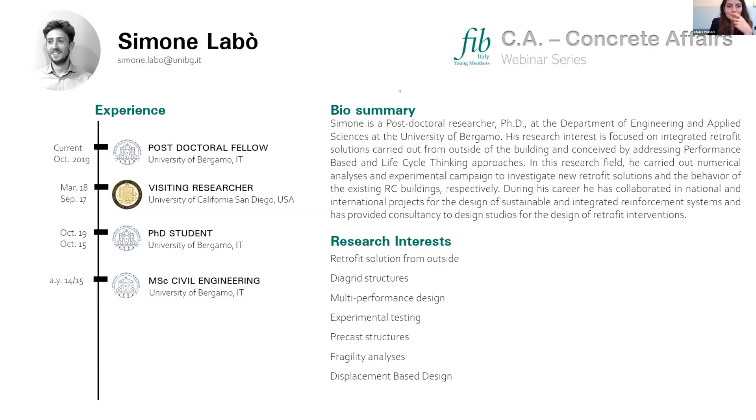Good evening. I'm just trying to understand how to share my presentation. So may you see the presentation? Yes, perfect. Okay, thank you, sorry.

Good evening, everybody. In this presentation, we are going to talk about integrated and sustainable retrofit solutions adopting life cycle thinking principles. We are going to present some concepts and results that we produced with our research group at the University of Bergamo.

It's well known that the construction sector is a very impacting sector, responsible for 50% of raw material consumption, 35% of waste production, 35% of energy consumption, and also 35% of greenhouse gas emissions.

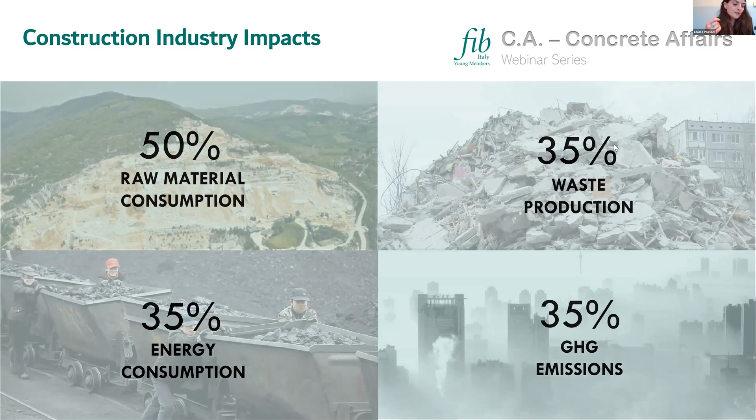I don't know if you noted it, but lately every seminar and every paper about sustainability of the construction sector just opens with this figure and these numbers. Often we are so used to these numbers that we don't realize anymore what they represent, and that behind these figures we have real and tangible impacts that, years after years, spoil our environment, our landscape, our planet, and our health.

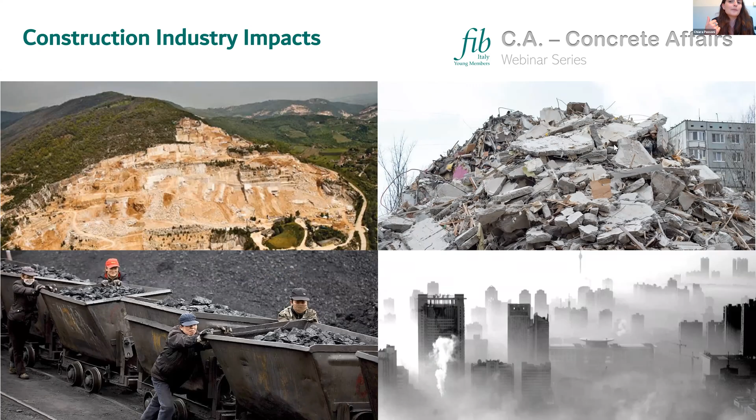So to make these numbers more tangible, I would like to report some data about the construction industry impacts. Just to make an example, in Italy last year, 29 million cubic meters of sand and gravel were extracted, 26.8 million cubic meters of limestone, and 3.6 million of clay, just to produce about 19.2 million tons of concrete, which is about 318 kilos of concrete per inhabitant. And this is just for Italy, and just for the last year.

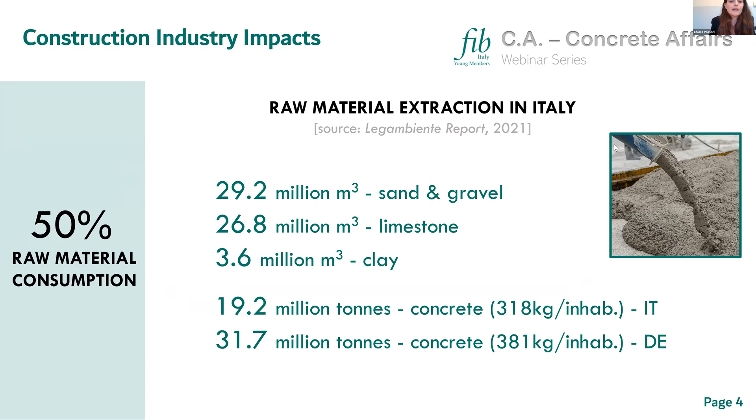About waste production, we know that C&D waste, construction and demolition waste, is the largest waste stream in Europe in terms of mass. In EU 28 in 2016, 374 million tons were produced, excluding excavated soil. Considering that by 2020 a recovery target of 70% of this kind of waste was set, it seems that we have a high level of recovery of this waste from construction and demolition.

However, the high recovery of construction and demolition waste is often based to a large extent on backfilling or low-grade recovery, for example for road subbases and so on. In addition, we should consider that in Italy a great part of the C&D waste is still not tracked, so data are not entirely credible, and the situation may be much worse than what appears.

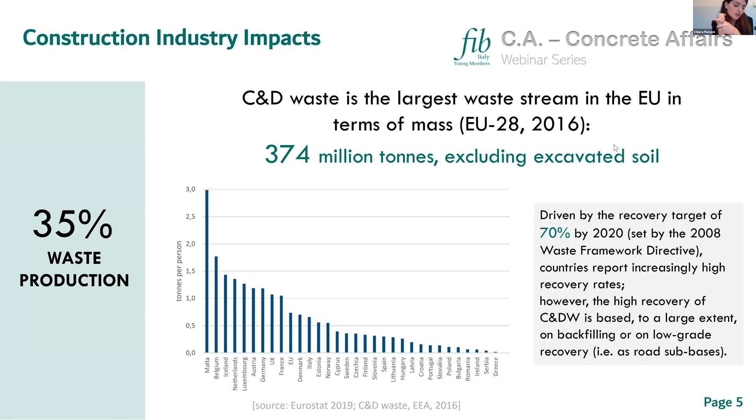About greenhouse gas emissions and energy consumption, we know that residential buildings are responsible for a large share of greenhouse gas emissions in Europe, due to operational energy use, especially for heating, cooling, generation of hot water, lighting, and so on. But this is not the only impact of the construction sector on the environment, because we should also consider that the production of construction materials generates a great share of greenhouse gas emissions, especially for steel and concrete.

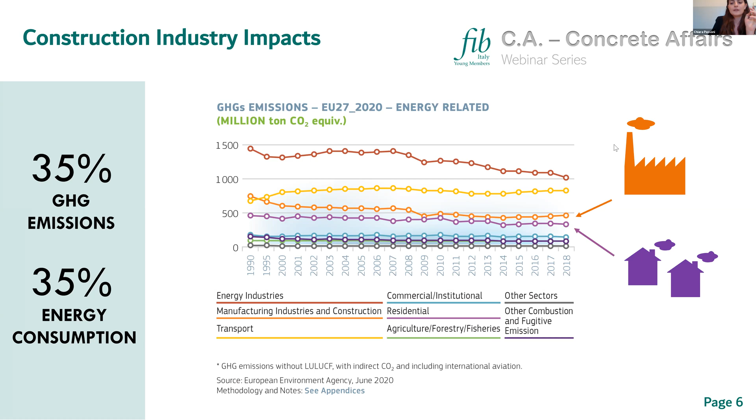So if we consider some 2012 data, we know that the steel and cement industries together accounted for 8% of global energy use and 15% of global anthropogenic CO2 emissions. And from 2012 to now, steel and cement consumption has greatly increased, so the greenhouse gas emissions connected to just these industries have surely increased too, not even considering all the other construction materials we use in the construction sector.

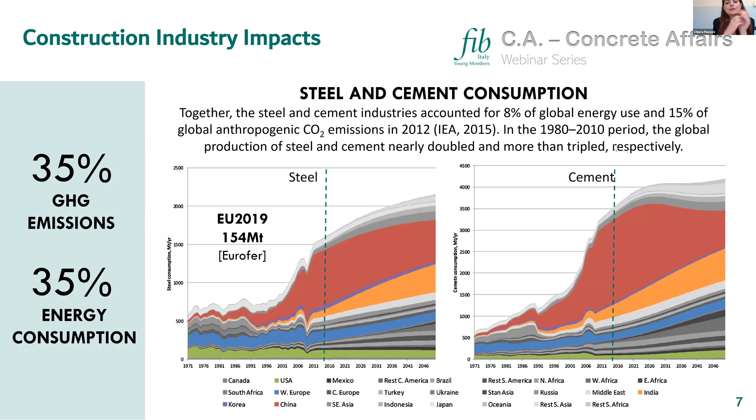These are just some numbers, but I wanted to give you an idea that the impacts of the construction sector are real and very tangible, and that all this is contributing to global warming and climate change. The effects of the construction sector's impacts on our environment are ones we can touch with our own hands, and we can see them in each of our cities. So now the point is, what can we do as engineers, as researchers, as designers, to reduce the impacts of this construction sector?

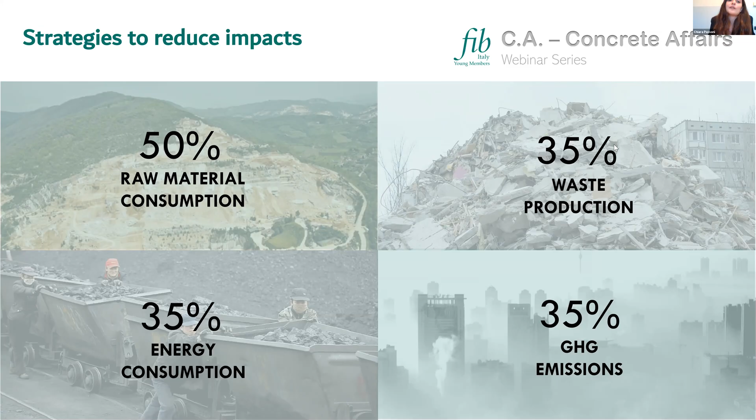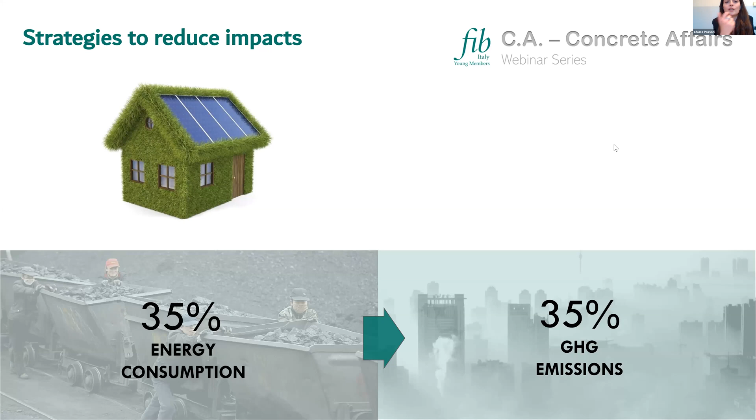So now, considering the European strategies to reduce impacts of the construction sector, we are focusing on the energy consumption of buildings, and so on the greenhouse gas reduction connected to that energy consumption. A BPIE report of 2020 states that in order to reduce greenhouse gas emissions and reach climate neutrality in Europe by 2050, we really need strong interventions on our buildings to reduce their emissions.

They compare two different strategies and scenarios, and they notice that the only way to reach climate neutrality by 2050 is what they call a responsible policy scenario, in which we have to shift to 53% use of renewable energy and reduce the consumption of fossil energy to 47%. And we cannot reach these ambitious targets if we just think about constructing new eco-efficient buildings; we need to renovate the existing building stock.

So what they say is that in order to reach such ambitious goals, we have to shift from the actual deep renovation rate, which is equal to 1% per year, to 3% per year, a medium value between 2015 and 2030. Since we are in 2021, we need to increase the deep renovation rate to at least 4.4% on average in the decade from 2020 to 2030 in order to reach climate neutrality in Europe.

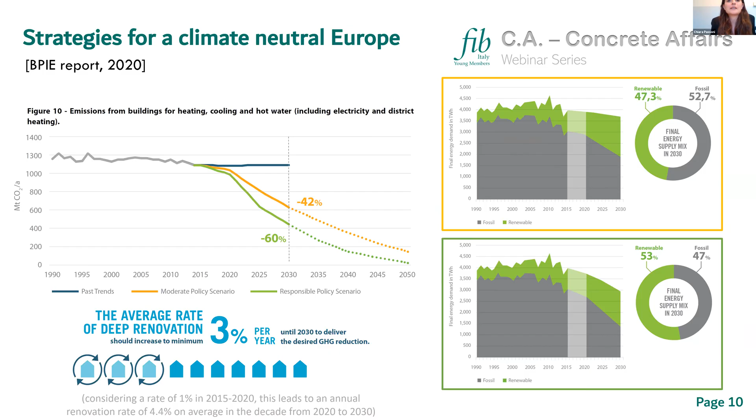But even though this is a great ambitious goal, which will require great effort and great policies to reach, we are still not considering some impacts which are very important. Among others, two important issues: the first is that when we are building new energy efficient buildings, or renovating existing ones to achieve good energy performance, we are at the same time increasing embodied energy.

This is the energy that the building consumes during production and construction, or during an intervention, and at the end of life. So what we have to do is make a balance between operational energy and embodied energy in order to reduce the global energy consumption and greenhouse gas emissions of our buildings. Otherwise we're not going to reach our targets, because this embodied energy is too high, and it doesn't matter that we are reducing operational energy if we have high embodied energy. So we have to reduce energy consumption and greenhouse gas emissions considering the whole building life cycle.

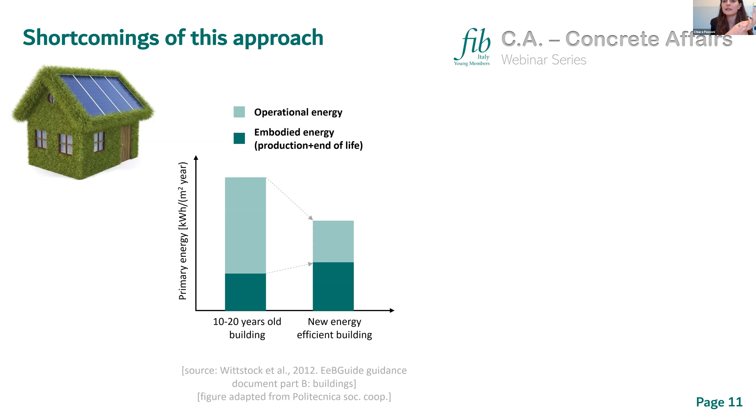In addition, we have just seen that in order to reach our goals to reduce energy consumption in existing buildings, we have to renovate them. So another very important point when renovating existing buildings is to also consider their other deficiencies, especially those connected to structural vulnerability against hazards, and especially against seismic actions.

So what happens when we evaluate energy interventions aimed at reducing energy consumption, and we re-evaluate them also considering the presence or possible occurrence of an earthquake? What happens is that we have indeed a longer payback time than expected, and we also have higher impacts over the life cycle. These impacts and this payback time just increase as the seismic risk increases.

And what can also happen is that in case of very strong earthquakes, we may have the collapse of the building, and this will cause the total loss of the investment, and at the same time we could also have the loss of human lives.

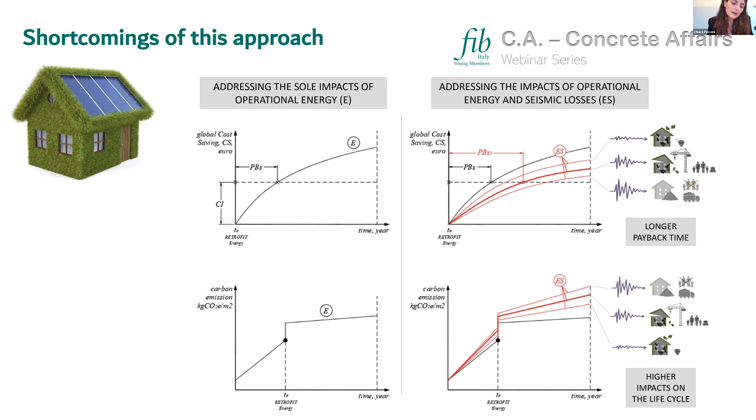With this in mind, it's possible to understand how the actual strategy to reduce construction impacts and greenhouse gas emissions by just reducing the energy consumption of buildings in the use phase is not enough. A building renovated just from an energy point of view is a great missed chance to improve our obsolete building stock in a wiser manner.

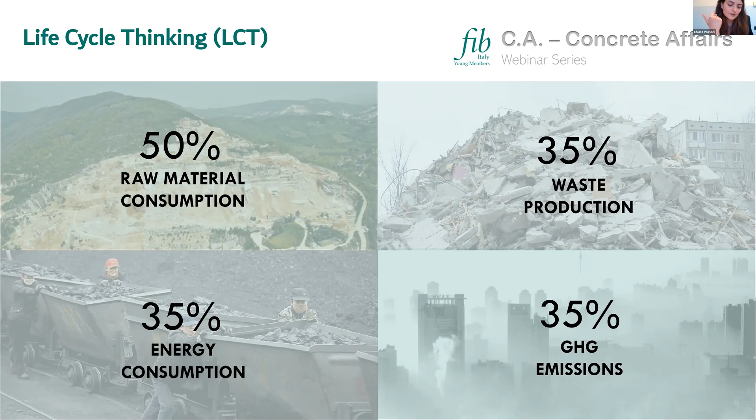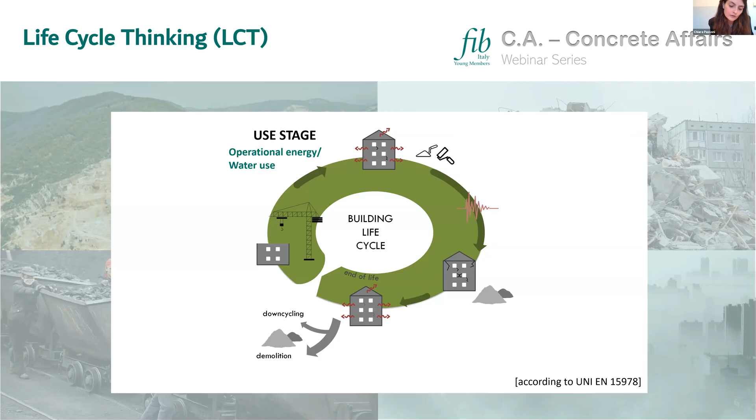So we can do much more, and what we can do is approach the construction industry, building renovation, the study of new structural systems, or new construction materials, just adopting a new approach: the life cycle thinking approach. This approach goes beyond the sole operational stage of the building; it considers all stages of its life cycle: product stage, construction stage, use stage intended as maintenance, use stage intended as behavior against hazards, end of life stage, and also beyond end of life stage, so reuse, recovery, and recycling of materials.

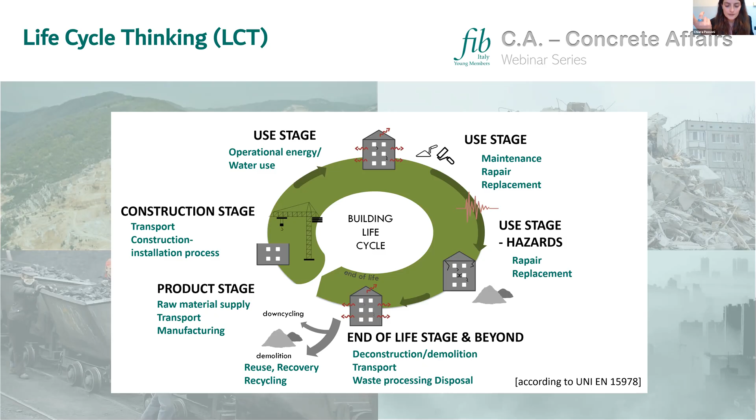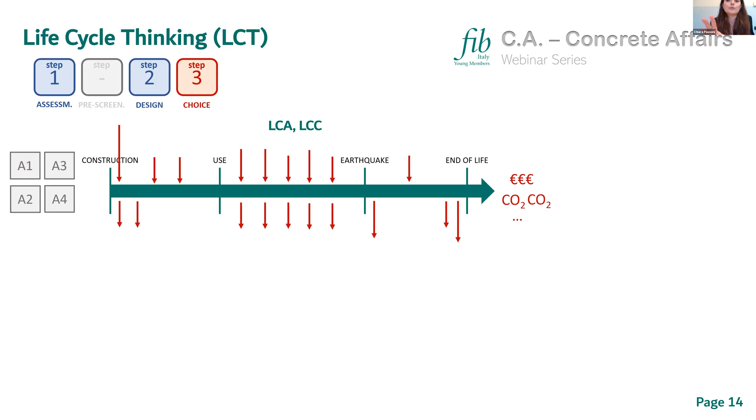This life cycle thinking approach may be applied in our projects and researches considering two methods. The first method, which is most applied, is to adopt life cycle thinking by using life cycle tools, which are life cycle assessment analysis or life cycle cost analysis—analyses and tools that allow us to calculate and compute all the impacts and costs along the building life cycle, considering all stages, evaluating input and output, and comparing different alternatives, or making a ranking of these alternatives on the basis of the results.

But what we are doing in this case is creating a ranking that may select the best options, but among options that may still be very impacting on the environment, or very expensive solutions. So we are not sure that the building, solution, or alternative we are selecting with these methods is truly sustainable—because maybe it's just the best among the worst.

So what we should do to really adopt a life cycle thinking approach is shift our consideration to the beginning of the design stage. We introduce a first step before the design, introducing new life cycle thinking principles—principles aimed at reducing costs and impacts along the whole building life cycle.

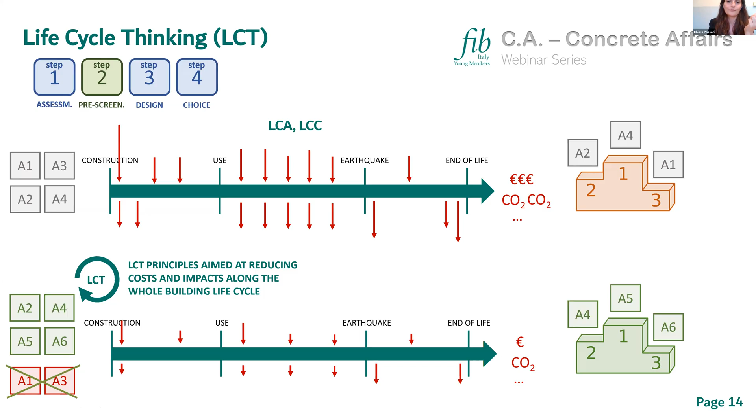So what are these principles? What are these life cycle thinking principles? We saw that life cycle thinking principles are aimed at controlling performance, impacts, and costs along the whole life cycle of the building, and at pursuing sustainability, but also resilience and safety.

Let's consider all the phases and stages of the building life cycle to define these life cycle thinking principles. Considering the product and construction stages, we would adopt sustainable, eco-efficient materials, produced with low-impact processes, and possibly adopt recycled or reused materials, according to the principle of circularity and circular economy.

More, we should use dry solutions and prefabricated solutions aimed at reducing construction time, impacts, costs, and risks connected to the construction site. In addition, we will prefer renovation of existing structures over demolition and reconstruction, in order to reduce the amount of C&D waste and exploit the great bank of construction materials we have in Europe—namely the existing building stock.

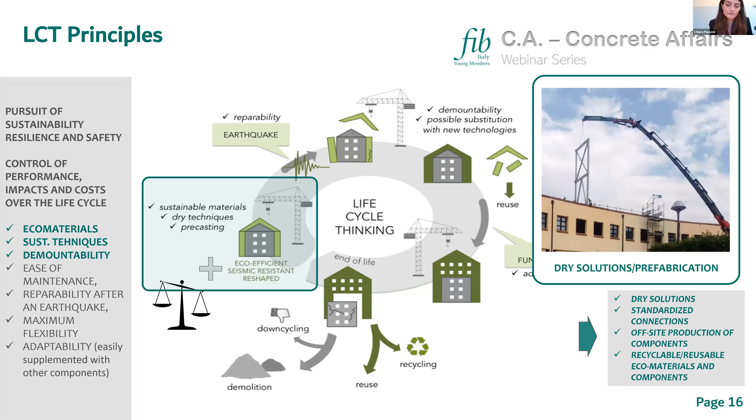In addition, considering the use phase, it's not just about adopting energy upgrading measures to reduce impacts during use—we should also consider other factors, like the possible occurrence of earthquakes. In this case, we need to design our solutions from the beginning in order to reduce damage to our buildings in case of earthquakes.

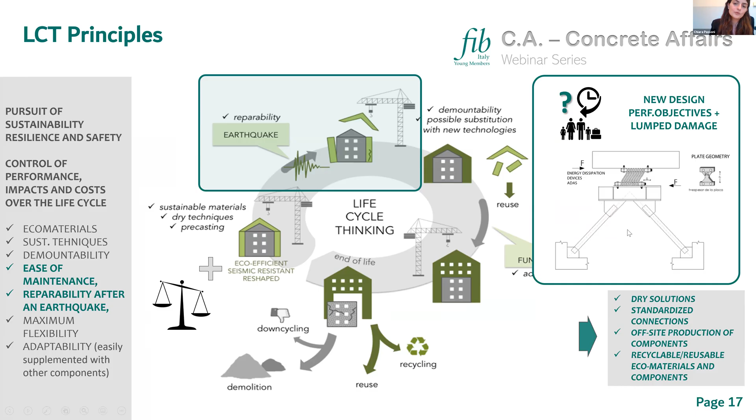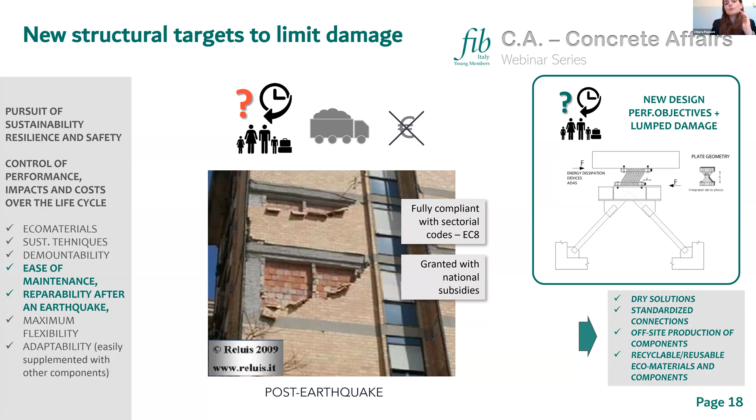So what we can do is design solutions that lump damage into replaceable fuses, which can be easily replaced after an earthquake, or consider demountable techniques in which it is easy to replace damaged elements. In addition, we can consider new performance objectives and structural targets aimed not just at saving lives and preventing collapse, but also at reducing damage to structural and non-structural elements and losses, even for high-intensity earthquakes, as you will see in the last part of this presentation with my colleague.

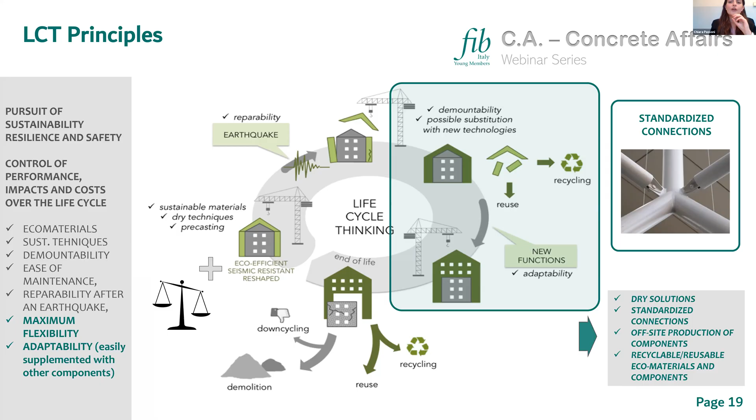Solutions and techniques should be designed to guarantee maximum flexibility and adaptability along the building life cycle, allowing easy substitution of elements if and when required. This is possible by considering, for example, standardized connections or interchangeable elements.

Thinking about the end of life of the building, we should consider this from the beginning of the design of our solutions. So we should consider dry solutions, demountable solutions which may be easily demounted and dismantled from the building, materials that can be recycled, and techniques or elements that can be reused in other buildings for the construction of other buildings.

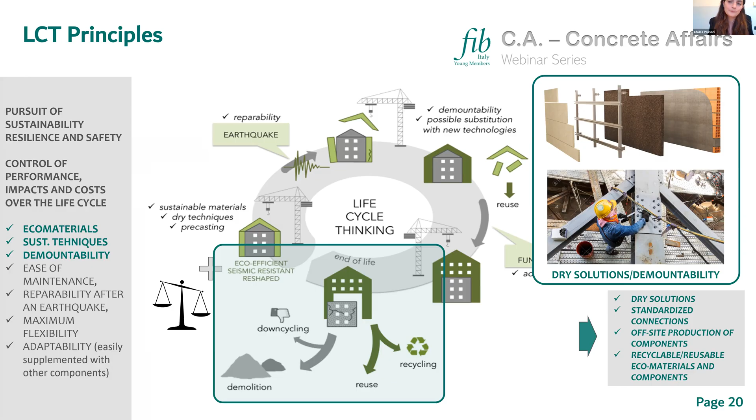Finally, since the major greenhouse gas reduction will come from the retrofit of existing buildings, we should consider retrofit intervention from the beginning to overcome the barriers of renovation. The renovation rate is too low, and we need to increase it if we want to reach the European targets in terms of emissions, so carbon neutrality by 2050.

We know that the major barrier to renovation is considered to be the inhabitants' relocations. For this reason, additional exoskeleton techniques have been proposed to enable a holistic renovation, structural, energy, and architectural, of existing buildings. What are exoskeletons?

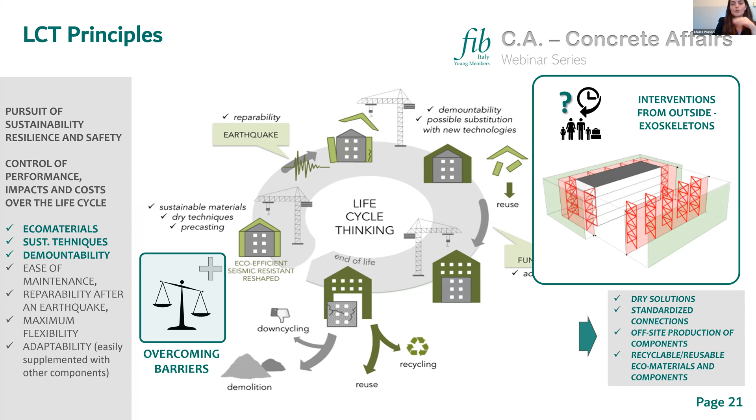Under a structural point of view, such exoskeletons may be realized in two ways: by considering wall solutions, lumping the strength and stiffness of the structural intervention into few elements realized with different technologies, and walls that may be perpendicular to the building, encased in a new skin of the building, or in adherence to the existing building, like in this example.

Or we can do shell solutions, which exploit the length of the facade and reduce the dimensions of the structural elements in both the substructure and the foundation system. This system may be realized, for example, with diagrid exoskeletons or with wooden additional skins.

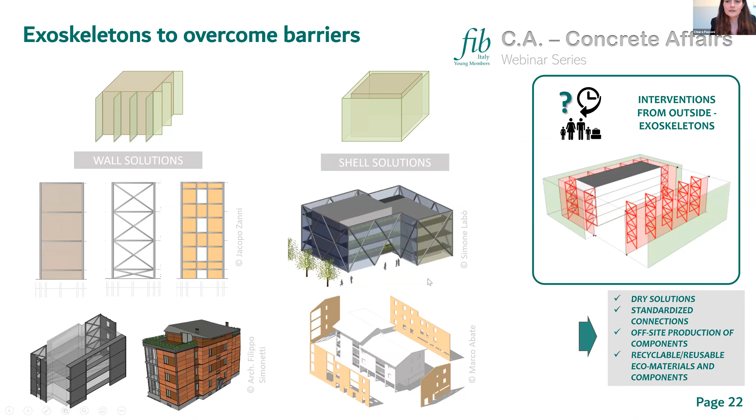To show you how this principle may be used at the beginning of the design of structural solutions, or retrofit solutions in general, in order to be compliant with the life cycle thinking approach, I'll show you an example of a holistic retrofit solution conceived to be compliant with life cycle thinking principles.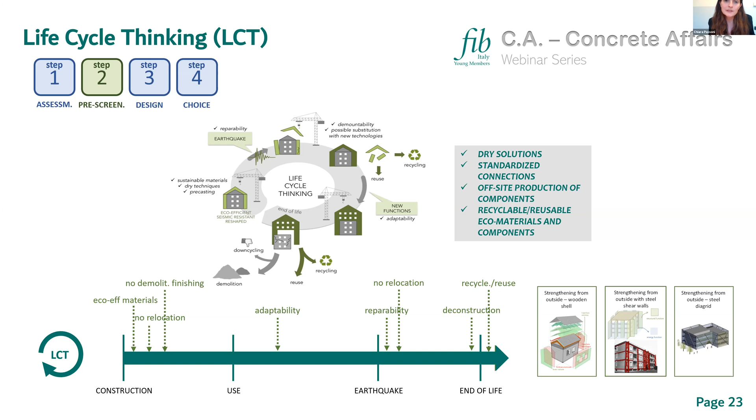This is the ADESA system, studied by the University of Bergamo with the University of Brescia and our commercial partners, Marlegno, Harpaceas, and Edilmatic, in the context of a regional grant on smart living.

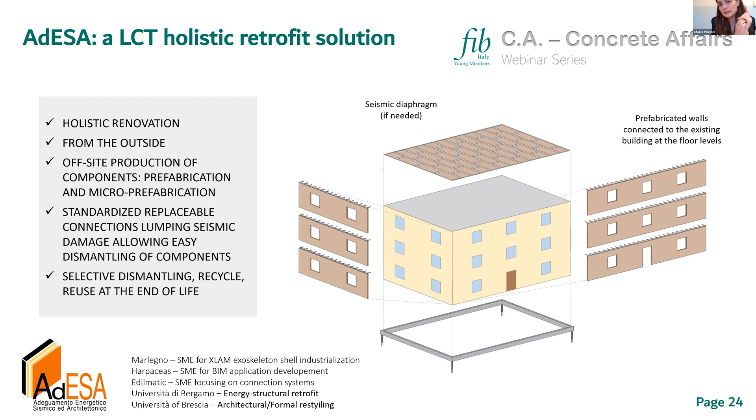What we propose is a system consisting of a new wooden envelope for existing buildings, able to improve the seismic and energy performances of the building, as well as the architectural layout.

The system is realized by adding to the existing layer of the building a new structural layer, a new thermal layer, and a new architectural layer that may vary from building to building.

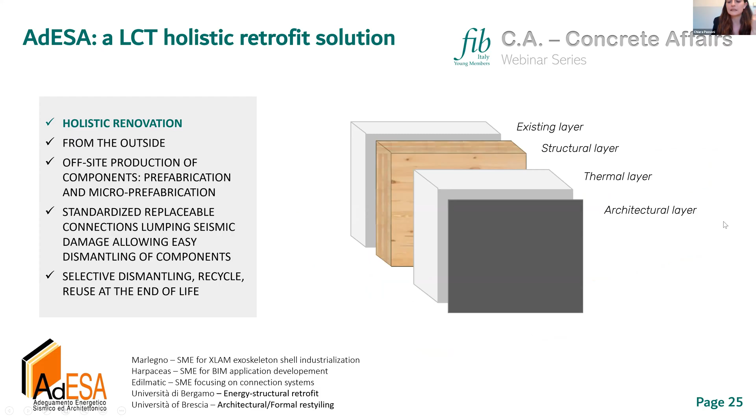The system, as I told you, is conceived to be compliant with life cycle thinking, so it is applied from the outside in order to overcome the barriers to renovation, and it is also conceived to be compliant with the principles of prefabrication.

And easy mountability of the system: all the elements will be produced and assembled off-site and just shipped and mounted on the construction site, in order to reduce the impacts of the construction site, the risks on the construction site, and also the time of construction.

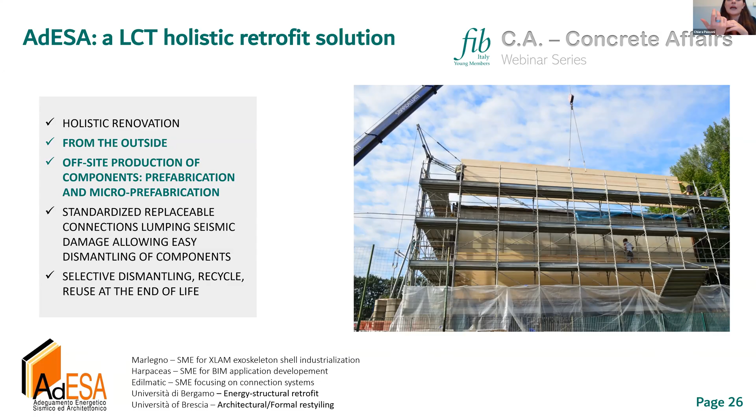In addition, the connections were studied in order to lump the damage in case of seismic events. So all the damage will be concentrated into these connection elements, which may be replaced after an earthquake. These connections, among the elements of the skin and between the exoskeleton and the building, are also conceived to allow for the selective dismantling of the system.

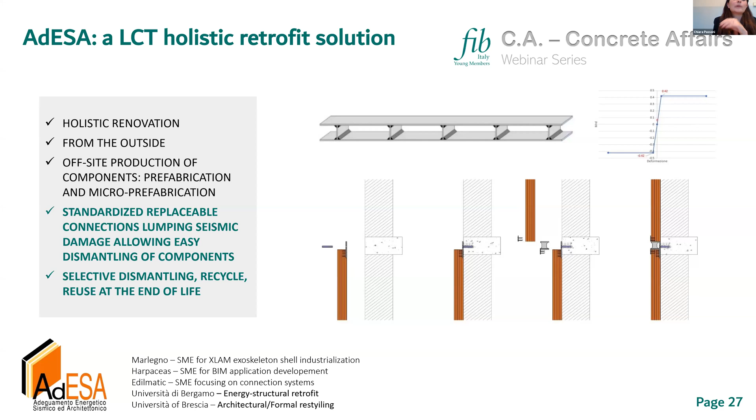In addition, all the layers of the system are conceived to be recyclable and reusable at the end of life. So this system was applied to a gym hall in Brescia, a city in northern Italy.

It's an ex-seismic zone 2, and a climatic zone E according to Italian codes. The system allowed it to pass from an energy class E to an energy class B, and from a seismic class F to a class A.

The construction cost of this pilot project was 380 euros per square meter of shell, and the construction time was about 4 or 5 months, excluding the stop due to the COVID pandemic.

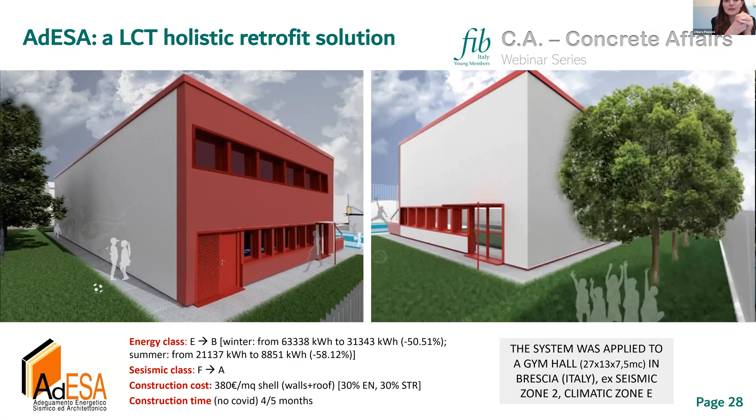Many other applications of the ADESA system will be realized in the next months, also thanks to the super bonus. So we will have soon some more data about this solution and its efficiency.

So just to conclude this first part of the presentation, I hope you have understood that when the life cycle thinking approach is adopted to conceive retrofit solutions for existing reinforced concrete buildings, the advantages in the reduction of impacts on the whole life cycle of the buildings are evident. So suppose we have this building on the left.

Suppose we consider 3 different retrofit scenarios leading to the same performances of the building at the use phase — for example, a reduction of 60% of the operational energy, which will lead to the same seismic performances.

When we consider demolition and reconstruction, what we have as impacts at the construction phase are the impacts connected to demolition of the existing building, plus all the impacts connected to constructing a new building, which will have higher embodied energy than the previous one.

And at the end of life, we need to demolish all these buildings that we have generated.

If we consider, on the other side, non-LCT-based techniques — for example, let's imagine strengthening all the nodes of these buildings — in this case we may have impacts connected to partial demolition of the buildings, at least the finishing, plus the impacts of producing new materials, new finishes, and the construction site.

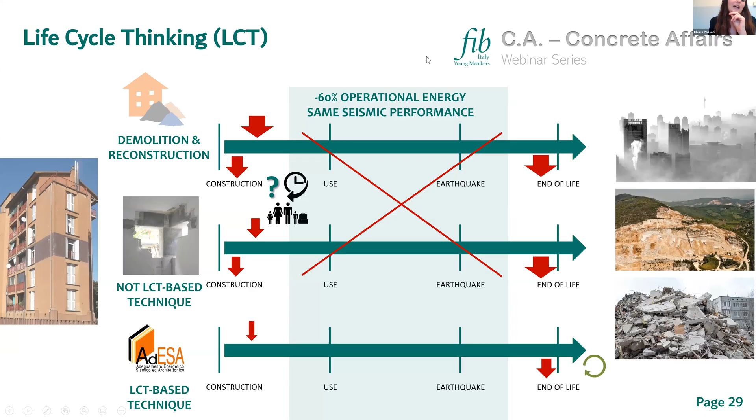In addition, we should consider another thing: the first two systems necessarily require the relocation of inhabitants. So very often, as we've seen in the first slides, these systems are not realized — so we don't even get this improvement of performance in the operational phase.

So in this first part of the presentation, I hope to have increased your awareness of the impacts of the construction industry, which are real and tangible.

And I showed you a possible way to reduce those impacts through the life cycle thinking approach, and how its principles may be adopted to renovate existing building stock to make it truly sustainable.

That may be done in all our research, in all our projects, everything we are doing for the construction sector. And as for the renovation of existing buildings, especially existing reinforced concrete buildings, I have introduced to you the exoskeleton.

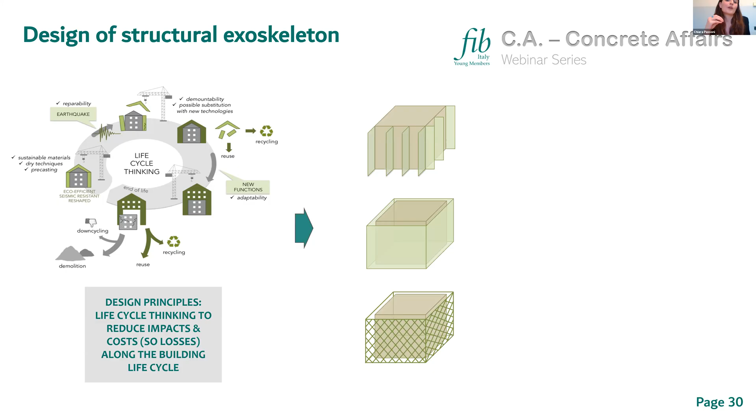These solutions are conceived to be compliant with life cycle thinking principles, and conceived to overcome the barriers of renovation. So in the second part of this presentation, I now leave the stage to my friend and colleague Simone Labò, who will show you some tools and new design targets for this structural and holistic exoskeleton. Thank you.

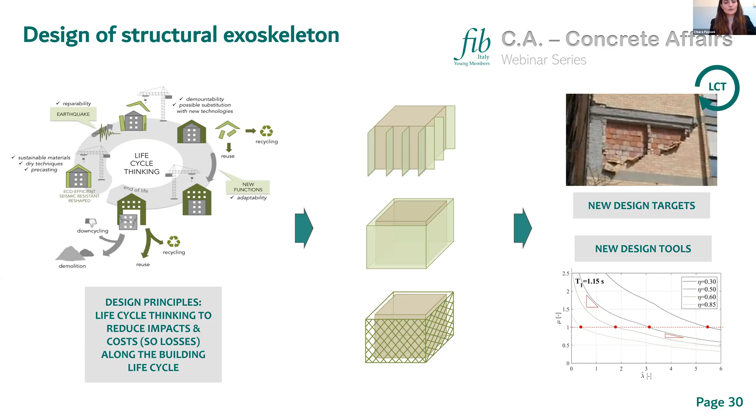Thank you, Chiara Passoni, for the introduction, and thank you, Marta, for the first introduction. Let me share my presentation. Okay.

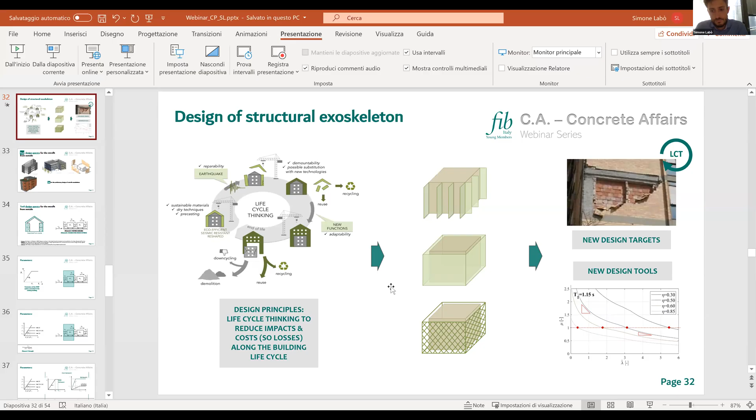Can you see my presentation? Yes, I do. So yeah, okay.

Thank you. I begin the second part of the webinar using what Chiara has just presented, that different technological applications have already been proposed.

What we would like to show here is a new tool for the preliminary design of this retrofit solution. The objective of this second part is to introduce a tool that allows us to have an idea of what the minimum stiffness of the retrofit should be to get a set design target.

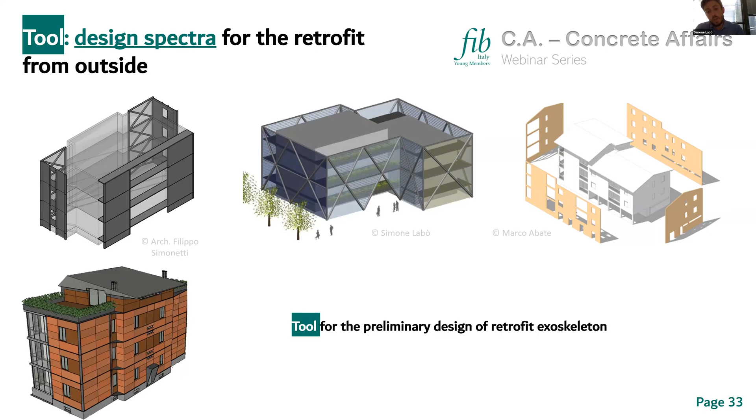To do this, starting from preliminary considerations made by other research works in the last year, we are representing our retrofitted system through a simplified 2-degree-of-freedom model. We can see here the pointer.

We can see here the simplified 2-degree-of-freedom system, in which element 1, described by the mass M1, the elastic stiffness K1, and the damping coefficient C1, represents the existing building, while the second element, defined through the mass M2, the elastic stiffness K2, and the damping coefficient C2, represents our retrofit solution. The two elements are connected by an elastic spring and a damping element.

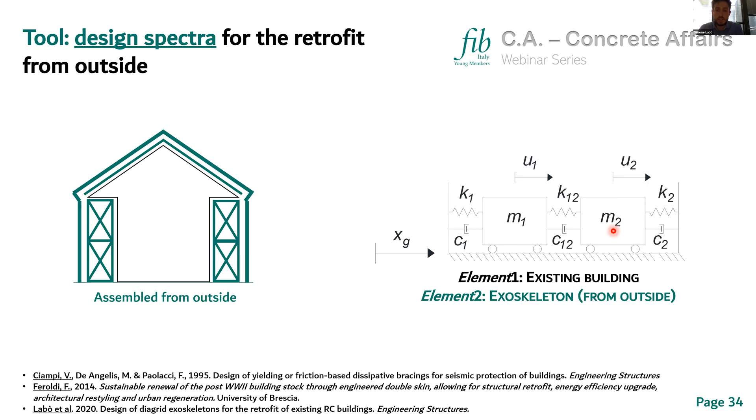And in this case today, the only nonlinear behavior introduced is for the existing building, which is represented through an elastic, perfectly plastic bilinear curve defined through the elastic stiffness, the yielding force, and the yielding displacement. I'm not going deep into the analytical aspect of the problem,

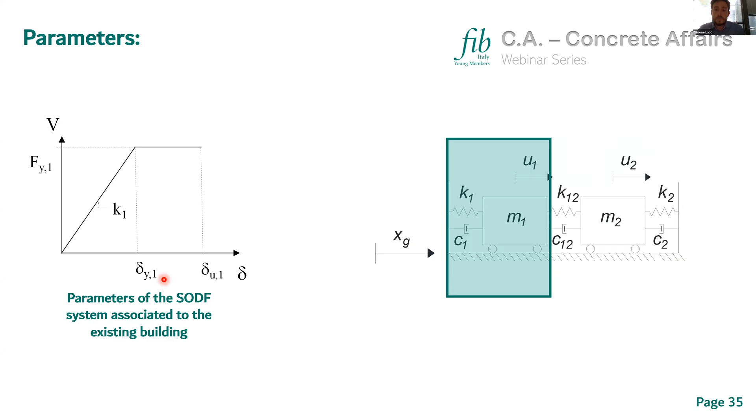but I have to introduce 3 parameters that are needed to read the design spectra I'm going to present. These 3 parameters are required to be sure we're on the same page when the design spectra are presented.

The first parameter is the strength parameter, represented through the symbol eta, obtained as the ratio between the yielding force of the existing building, element 1, and the elastic force to which the existing building would be subjected.

To be clear, lower values of eta represent weak buildings. So eta equal to 0.3 represents a weak building, while eta equal to 0.85, high values of eta, represent a strong building.

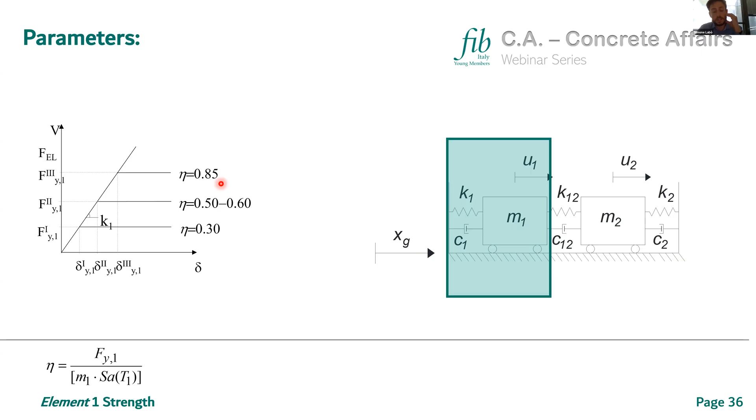The other 2 parameters are required to read the output of the design spectra. These are the ductility demand, mu, which could be obtained through the ratio between the maximum displacement experienced by the existing building after the retrofit, divided by the yielding displacement of the existing building.

What does it mean? This represents the ductility demand to the existing building after the retrofit. Higher displacement required to the existing building means more damage to the existing building, and we translate this aspect with high values of mu.

And the last parameter is the retrofit stiffness ratio, indicated with lambda tilde, expressed through the ratio between the elastic stiffness of the retrofit solution and the elastic stiffness of the existing building.

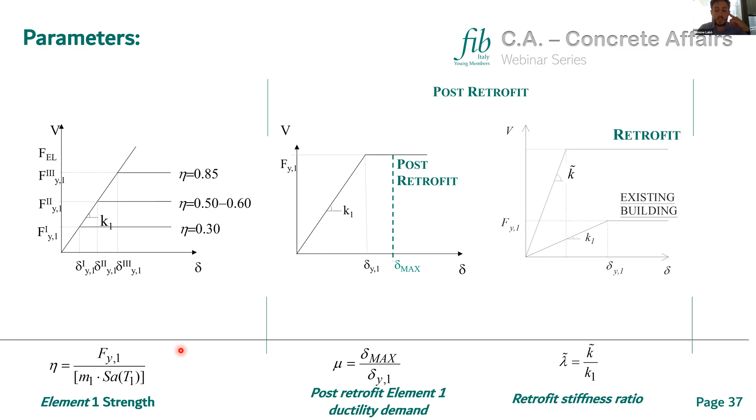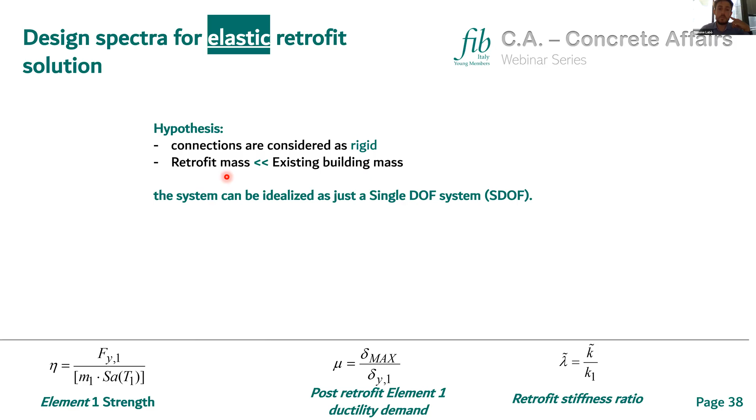I'm going to leave these three parameters at the bottom of the slide to help us keep them in mind. Given these three parameters, and under the hypothesis that the connections are rigid, as I already said, and the retrofit mass is lower than the existing building mass, we can derive the design spectra.

Design spectra are derived by solving the equations of motion of the simplified system described before, in this case in MATLAB, through the equation solver ODE45. I'm going to skip the analytical aspect of the problem, but this is an example of design spectra. What do design spectra plot?

In the figure, we can see the ductility demand, which helps us understand the displacement demand on the existing building, plotted as a function of the stiffness of the retrofit solution, indicated with lambda. For example, for a fixed existing building with fixed yielding displacement and elastic stiffness, we can use the design spectra to plot the displacement demand required on the existing building after retrofit as a function of the stiffness of the retrofit solution.

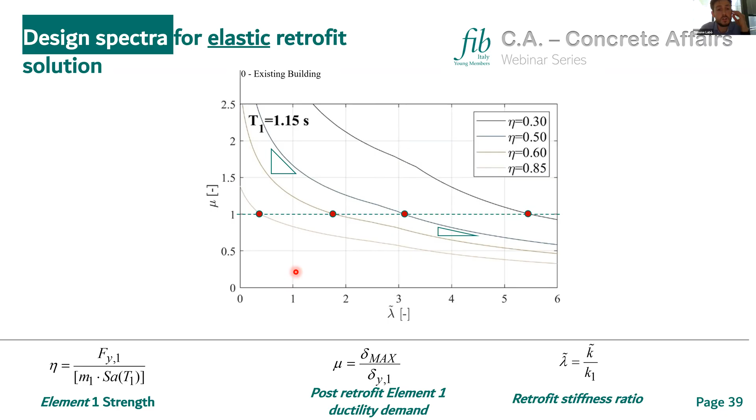But let's focus on the objective of the design spectra. Design spectra allow us to derive the minimum, or the required minimum, stiffness of the retrofit to reach a set design target, for a fixed value of eta and of the elastic period of the existing building. This is the main aspect, the main objective of this spectra.

What we can say is that this spectra can be applied to all the retrofit solutions presented before, both shear wall or shell structure can be designed, preliminarily, by using the design spectra. But the spectra cannot only be used for preliminary design; they could also be integrated to make, for example, considerations on large scale, or combined with energy analysis or loss cost analysis.

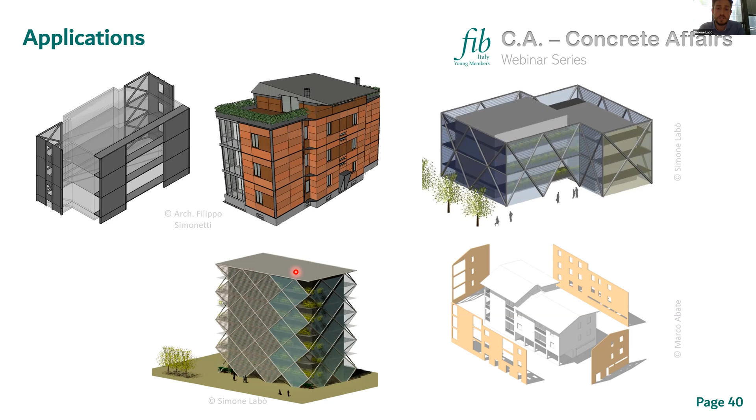What we would like to do here is summarize some of the main aspects presented in the first part of the webinar and in the second part. We propose a design procedure based on the definition of new performance objectives, considering the whole life cycle of the existing building, and design a new retrofit solution based on these performance objectives by using the design spectra presented here.

The proposed design procedure is developed in 5 steps. The first one is the easiest, because we just have to identify the building features following the procedure proposed by the current codes. The second step is a key step, because we introduce new performance objectives and consequently new design targets and operative choices to consider the whole life cycle of the retrofitted building.

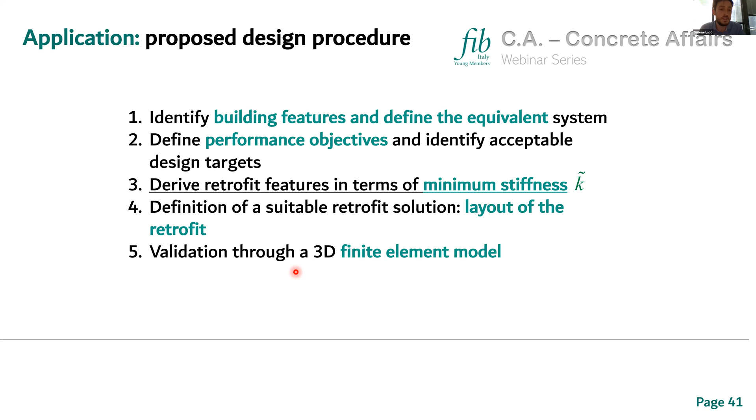In the third step, we will apply the design spectra to derive the minimum stiffness K. Finally, we define a layout of the retrofit, choosing one of the exoskeletons presented before, and we validate the procedure through a finite element model. As I said, the first step is...

In the first step, we follow what we do for a normal vulnerability analysis, in which the bilinear curve is derived, and the yielding force, the yielding displacement, the fundamental period, and the stiffness of the equivalent single degree of freedom system are derived.

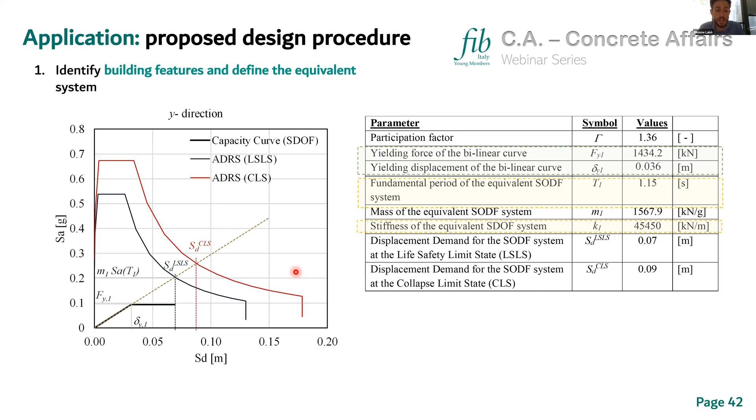In the second step of the design procedure, what is important to note is that to foster sustainability of the renovation process, a new multi-criteria approach that considers the whole life cycle of the retrofitted building should be considered. With this aim, when a life cycle perspective is considered, new design targets should be introduced.

These targets should account for environmental sustainability, life safety and structural feasibility, and social and economic sustainability. But what does it mean? For example, to consider environmental sustainability, we have to avoid damage on displacement and acceleration sensitive elements in order to guarantee operability in case of the design earthquake, or to reduce repair cost and impacts in case of a life safety earthquake.

Because if we have to demolish the retrofit solution after the life safety earthquake, probably this will not be an environmentally friendly solution. As for life safety and structural feasibility, we have to avoid overloading the existing foundation system or existing floors. And for the collapse prevention earthquake, we have to activate dissipative devices to allow a ductile behavior.

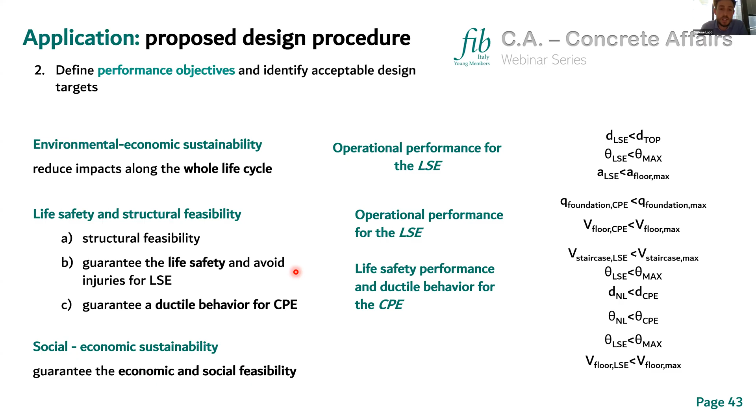What I would like to highlight today is that we have to shift from the traditional approach. We have to shift, for example, to guarantee the operational performance objective not only for the occasional earthquake probability, but also for rare earthquake probability.

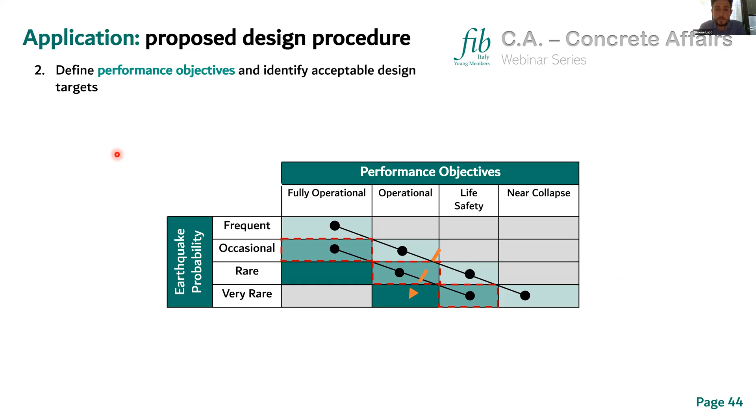In the third step, we are going to see how to apply design spectra to derive the minimum stiffness required to satisfy the imposed target, that is 0.3%, imposed to avoid damage of the non-structural elements.

To this drift target corresponds a top displacement equal to 75.6 millimeters, that divided by the yielding displacement and by the participating factor equal to 1.4, we obtain a value of mu equal to 1.5. I remember that mu is the ratio between the maximum displacement experienced by the existing building after the retrofit and the yielding displacement of the existing building.

So through this ratio, and with these values of mu, we get that the required minimum stiffness to satisfy this target corresponds to a lambda equal to almost 1.3. That means the stiffness of the retrofit should be 1.3 times the stiffness of the existing building, and only by introducing a retrofit with stiffness higher than 1.3 times the stiffness of the existing building can we reach the imposed target.

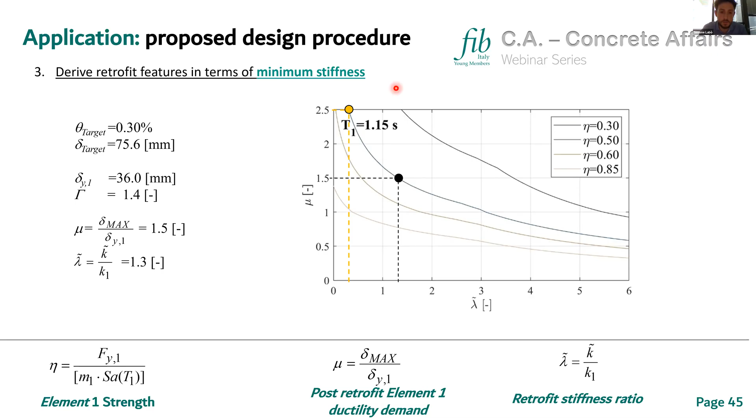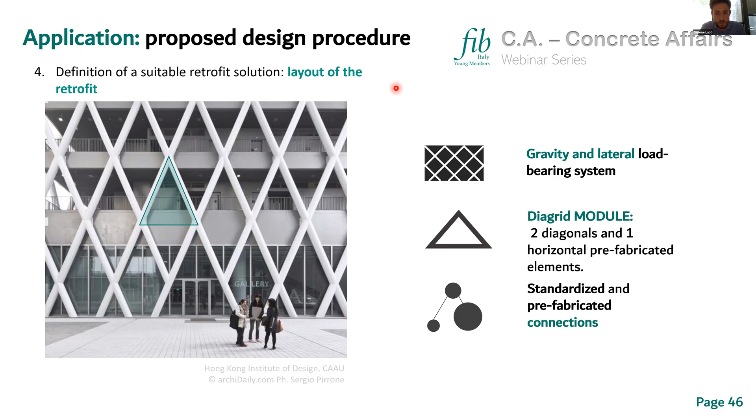As for the definition of the layout of the retrofit, we are focusing today on diagrid structures. Diagrid are structures introduced in recent years for tall buildings, developing their bearing system through triangular modules represented by two diagonals and one horizontal prefabricated element. But why did we choose diagrid for today?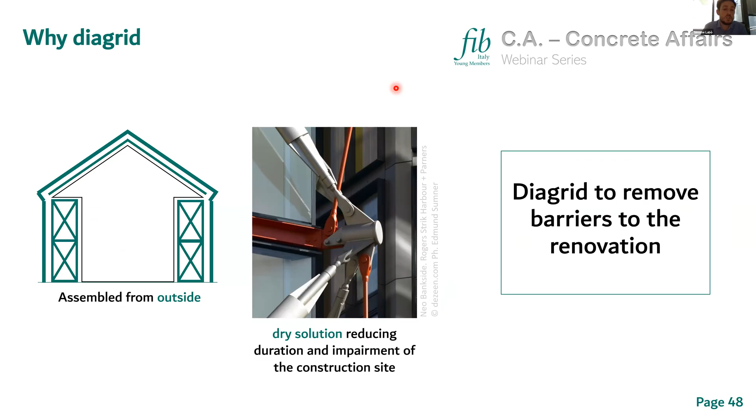Because they are suitable for integrated renovation, because diagrid could be used to remove barriers to renovation, being assembled from the outside of the building, and because they could be realized through dry solutions, thus reducing the duration of impairments at the construction site, and because they are compliant with the life cycle thinking principle previously presented.

I'm going to move to the validation through the finite element model. What we can see is a diagrid that satisfies the preliminary design through the use of design spectra for a design target equal to 0.3%. In this case, it's realized as an enlargement of the existing building to add additional living spaces on each floor. In the capacity curve, we can see that in the weakest direction the performance objectives are satisfied.

I've reported here just the pushover curve, but all the imposed targets were satisfied. The infill cracking, which was the main objective of the preliminary design, is satisfied at the life safety limit state.

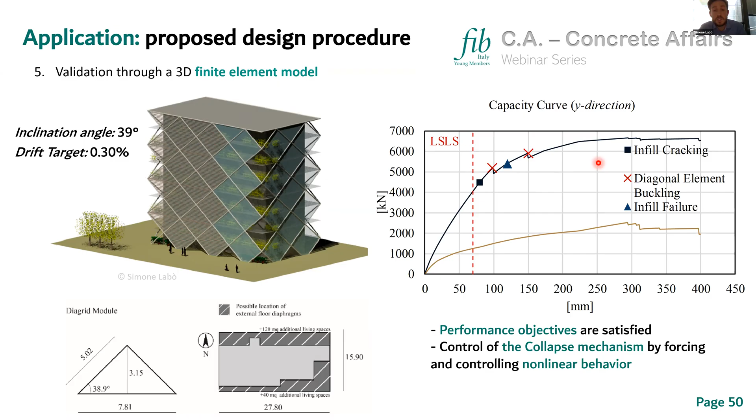To summarize what we have seen today: the first point of the problem statement is that we have to change our perspective to target sustainability, safety, and resilience at the same time in the building sector. In the first part of the presentation, a new life cycle thinking approach to rethink the traditional construction system was introduced.

In the last years, our research group tried to adopt this approach to propose new techniques for the structural renovation of the existing building stock, while in the second part of the presentation, Design Spectra as a tool for the preliminary design of this solution was presented.

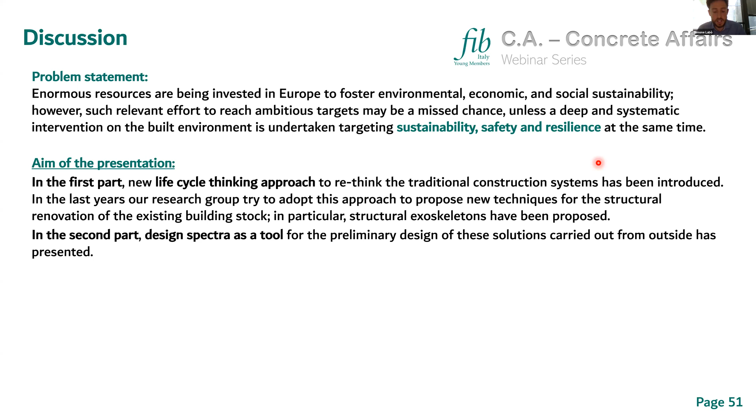What we would like to report and underline is that Design Spectra can be a useful tool for the preliminary design of the solution, but could also be easily integrated into, for example, large-scale analysis or sensitivity analysis that consider integration with energy aspects or life cycle cost analysis.

We would like to conclude our presentation through three powerful points. The impacts of the construction sector cannot be ignored, and all of us are responsible for the state of our environment. Adopting life cycle thinking principles, new structural systems and retrofit techniques have to be conceived aimed at reducing the impacts of construction, but many other solutions still need to be discovered. More importantly, now it's time for all of us to take action to improve the sustainability, safety, and resilience of our construction.